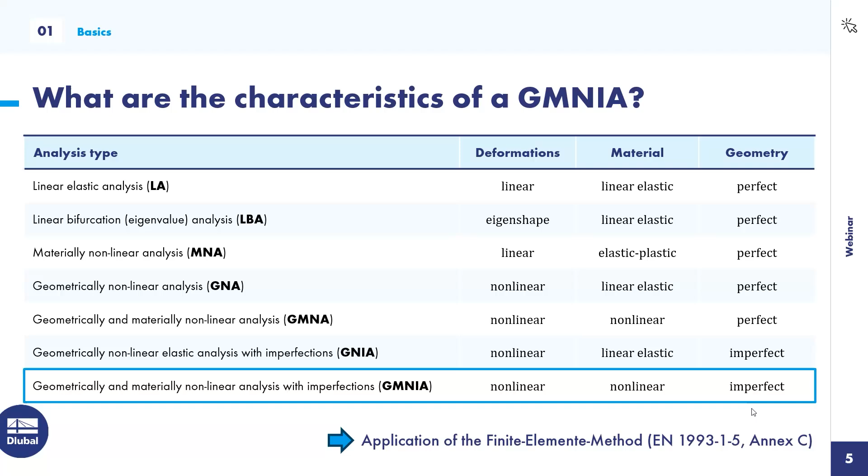Some rules for the application of a finite element method in this context are given in Eurocode 3, part 1.5, Annex C. And this will shortly be replaced by a dedicated Eurocode dealing with finite element methods and their application for steel structures, which will be bundled in Eurocode 3.1.14 in the second generation of the Eurocode. And I will refer to this new code as well during this presentation.

You can think of the GMNIA as a virtual capacity test, which means that the design load is increased by a load factor until a clear state of failure is reached. Two limit states are defined in Eurocode 3 Part 1-5 for the definition of failure and the determination of the critical load factor, which is the minimum of the following.

The load factor when the maximum of the load-deformation curve is reached, as shown here on the left side of the slide, and the load factor when a maximum value of the principal plastic membrane strain is reached. This is usually given by the annex or the base code as 5%, which is tolerable, but there might be some additional requirements in the national annexes.

The critical load factor is then the minimum of those two alpha U values, and this is then checked against the product of two safety factors on the resistance side, namely alpha 1, which describes the uncertainty of the numerical model, and alpha 2, which describes the uncertainty of the load and resistance model. Here it is recommended to stick to gamma M1 if the observed failure mode corresponds to stability, or gamma M2 if we see that the maximum plastic membrane strain is reached.

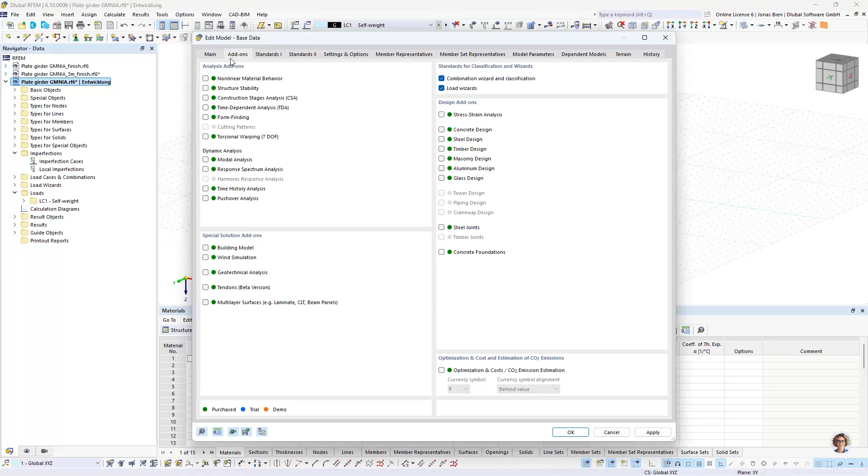All right, after we clarified this, let's go into the program and start modeling this. So I have already prepared a fresh file where we can now introduce the plate girder. As you can see, I have no objects here whatsoever, and also if we look into the base data of this file, there are no specific options activated. It's all a standard type of model, 3D and so on.

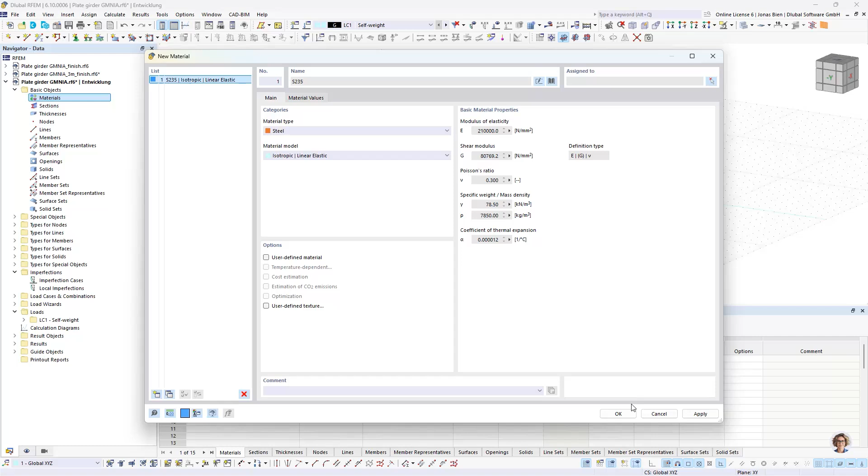Okay. So first of all, let's start with the material. We said we want to use an S235. So let's choose one. I always like to choose one that is related to Eurocode 3, but another one would also work. Then let's move on with the modeling of the member itself. We could either directly go with the surface definition and try to place the flanges and the web plates in the correct locations, and also then we have to assign the correct thicknesses and so on. But we can also use another way.

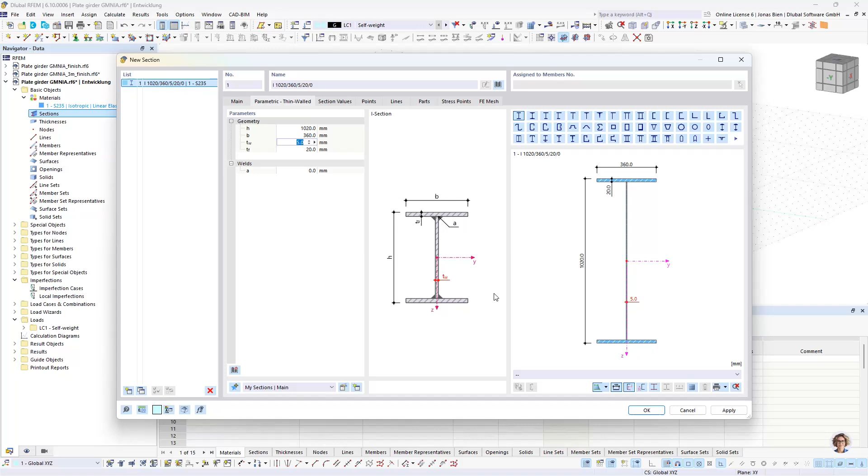We can first start with a member that has the correct cross-section, and then we transfer this member into a surface model. So I start with defining a parametric welded double symmetric I-section in my section dialog with the respective dimensions that I want to have. So height is 1020 millimeters, width 360, thickness of the web would be 5 millimeters, and the flanges 20. So now it more or less looks like the picture that I have shown on my slides.

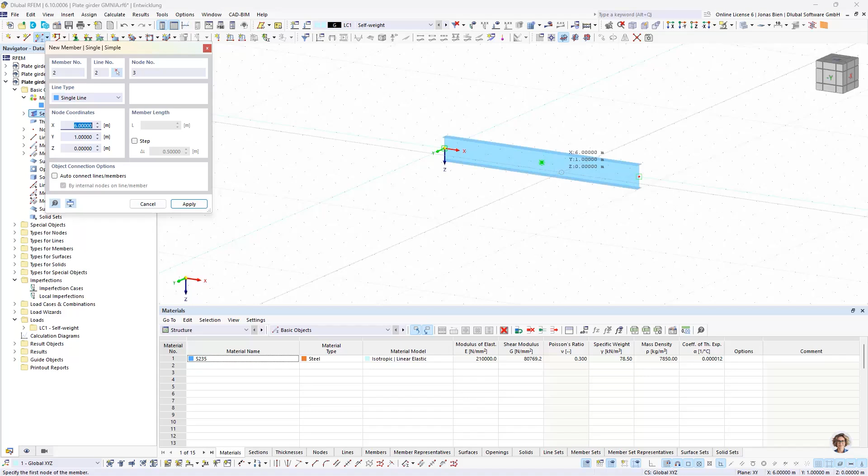I accept via OK, and then I just place one half of my plate girder in the model. So one span was 4.5 meters, so I want to take in the initial model 2 panels, and then we can later mirror it. So before I generate surfaces from this member, I also divide it, because I want to have a stiffener and some load introduction lines at the central position here. So I first divide this member with one intermediate node, and then I move on and generate surfaces.

And what this does, it already automatically generates these thicknesses that I need to represent this section in a surface model. It creates the nodes, the lines, and finally the surfaces that are necessary for this model. So this is a good starting point, I think. Next, we want to create the stiffeners to finish the surface modeling part. Therefore, I need an additional thickness of 12 millimeters that I wanted to use for the stiffeners. I can also write a reminder for myself that this is for the stiffener, this is the web plate, and this thickness is defined for the flange plates.

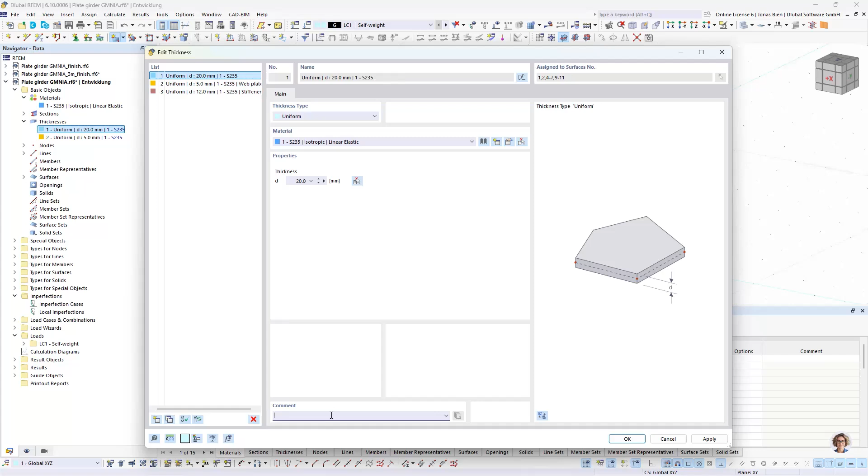Okay, I accept. And then I just place some rectangular surfaces in those positions where I later want to apply the loads. And then if we think about this as being the left half of our plate girder, we also said we want rigid end posts. So I would generate this by adding some outstanding cantilever part here with an additional stiffener to really have a very compact section at the end that can serve as a rigid end post.

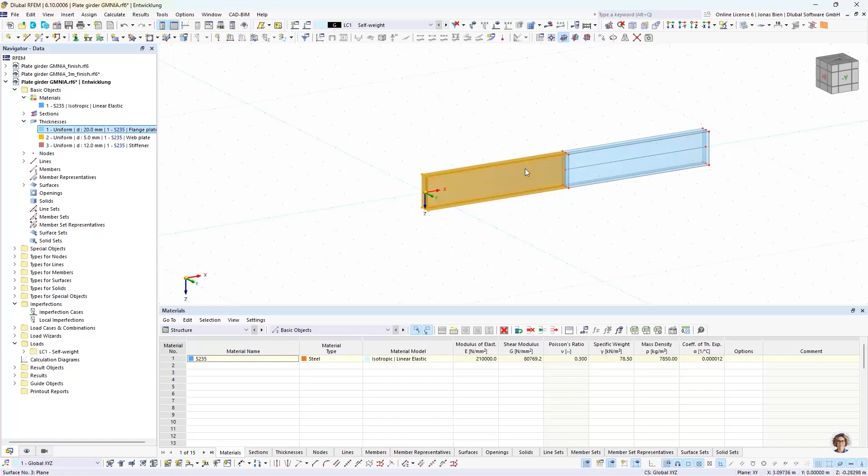And I can come to this modeling variant by just copying, for example, this panel here to the end. And then we know that the length of this is also 4.5 meter, and I want to have a very short and compact cell here at the end. So I just move the end section back towards the initial position of this stiffener by, let's say, 4.2 meter. And then I have a nice rigid end post here without needing to define additional surfaces by hand.

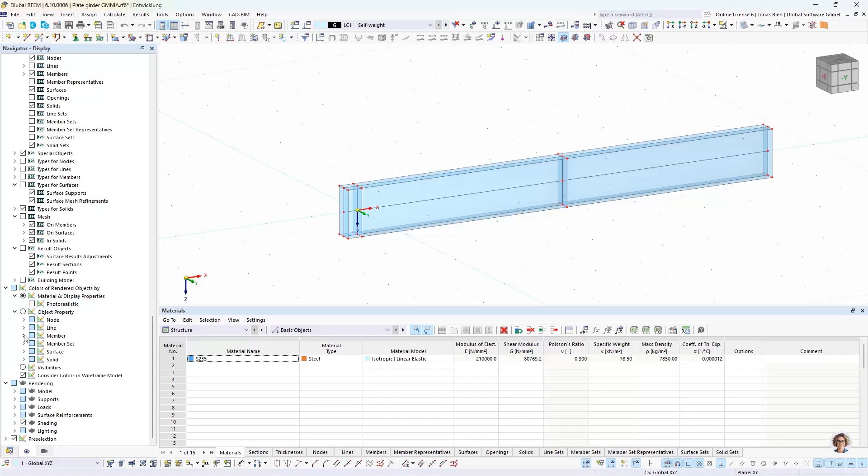Okay, so, oops, didn't mean to do that. All right, so then we can check maybe if we assigned the correct thicknesses. I always like to check the rendering based on the thickness. So we get a nice overview of what thicknesses are represented in the model and where they are. So this seems all fine to me. So we can continue with assigning the supports.

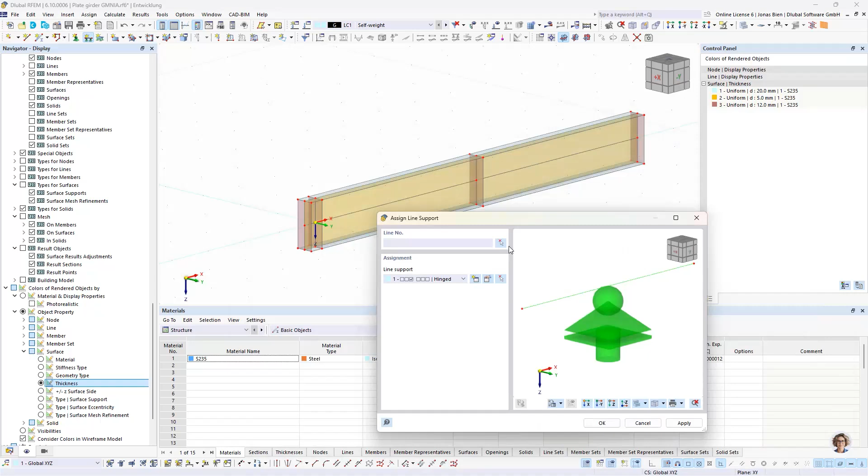And I want to avoid singularities at the vertical supports. So I try to use line supports at this second line of the stiffener here. And I just want to support this line in Z direction. I don't want to restrain any deformation along the line or in transverse direction. So I only support, I already see another problem because we defined those rectangular stiffeners here over the existing surfaces. We have some double lines here, and we can quickly merge them by just cutting and merging them via this tool. And now we have single lines here in these locations. So that's a quick fix. And now I move on and assign the vertical supports here at these two lines.

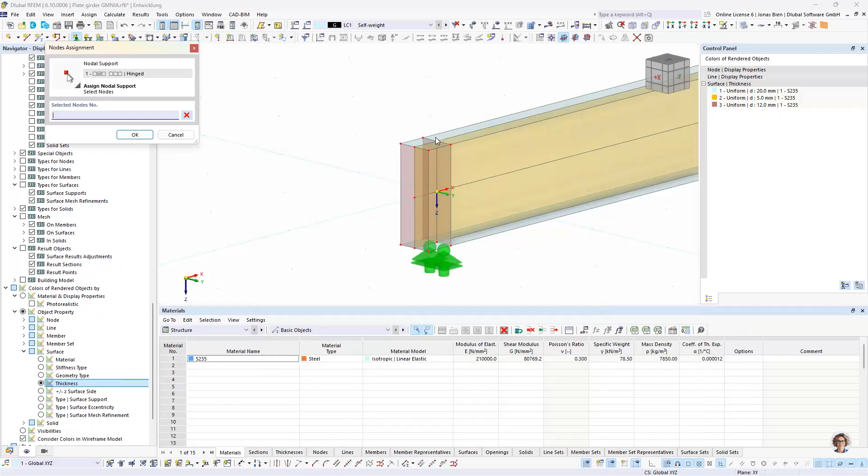Then I need to take care of the lateral supports. These I assign as nodal supports in some points that are very stiff. So first of all, I have my lateral supports that I wanted to assign at the ends and also in these quarter points. So I choose as a point of reference the crossing between flange and web plates and the stiffeners. And then I also need to make sure to also couple this point here in Y direction so it does not tilt. And also I need to somehow support my model in X direction. And that's why I also want to define one support in global X and Y direction at the lower flange here, like here. All right. So that would also be the respective support conditions that I want for my half model.

I can later just also mirror them when I want to create the full model. But before we do so, it would be wise to also define the loads, because there we can also leverage on the mirror operation. So we go ahead and define our loads. Maybe one look back to the task description. Yeah, here we can already see that we have concentrated loads, 3 different loads here above the endpoints and the quarter points. The first one represents dead weight. The second one comes from snow, and the third one comes from wind pressure. So these I want to define separately for those 3 load cases.

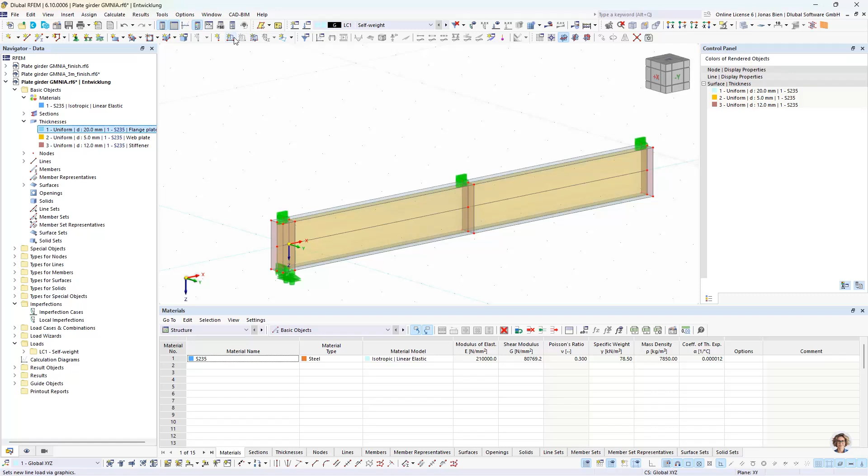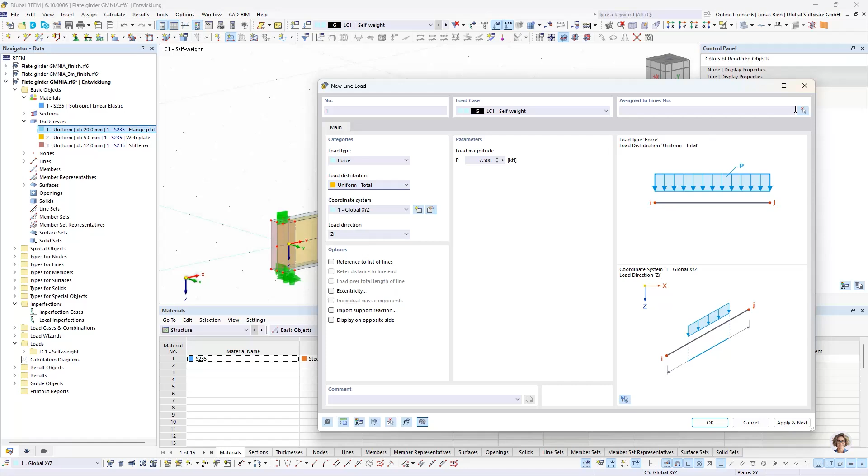So let's start, or maybe we start with the definition of the dead load here in the first case. So let's do that. I want to apply those loads as line loads, also again to avoid singularities when using nodal loads. And I could now go along and start with calculating my equivalent line load for a concentrated load of, for example, 15 kilonewtons by hand. But I could also use load distribution type uniform total, where the program does this job for me. And I just have to enter the total load that I want to apply over the length of one line. And since I have 2 lines here, I need to divide my 15 kilonewtons by 2 to get the total load for one line. I want to apply this in Z direction,

and now I just need to select those 2, assign this, and Rfem already calculated the correct kilonewton per meter value for us. If we multiply this value by 0.36 for the width of this flange, then we get 15 kilonewtons in total as we wanted.

Okay, we can then just copy this definition to the internal lines or purlins where the load is transferred to our plate girder. Here we had a slightly higher load of, I think it was in total 25. So each line gets 12.5 kilonewton. And this definition we can also copy to the central lines here.

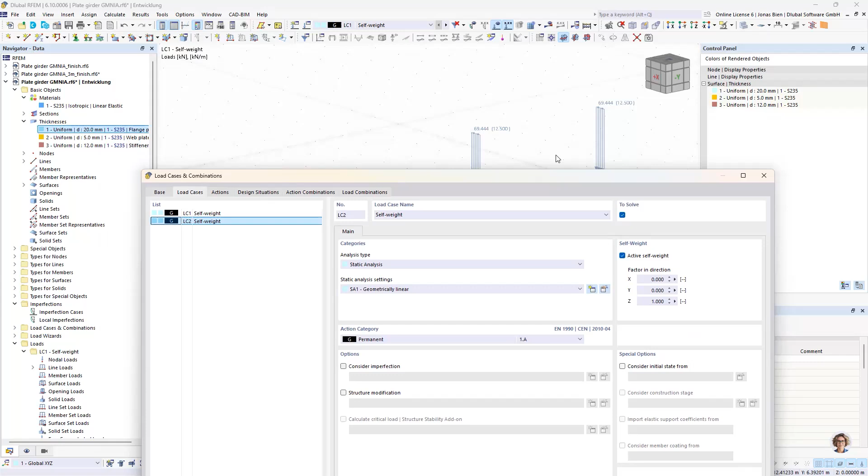And now we make a smart move and generate our second and third load case from our first load case. And we do this by copying our first load case. This means that also all loads that we defined in this load case are copied. So we just have to change the action category. Now in the first place, I want to define the snow loads, and we have to take care to deactivate the self-weight if we copy from the self-weight load case. Otherwise, that would be considered twice.

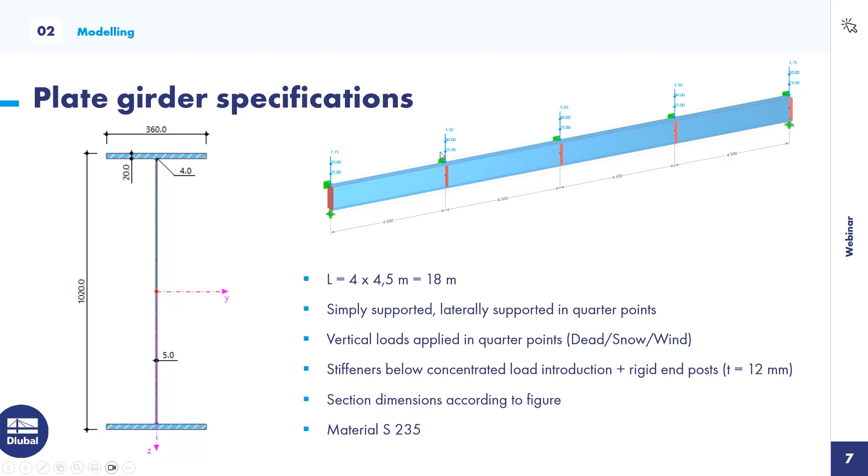And we do the same for wind, choose the appropriate action category, and click OK. And now we can go to the table. This is the easiest way I find to manipulate those load values, because we just want to change values. As you could see here in the slide, we have the same load type for all load cases, just different amplitudes. So for snow, we would have 20 kilonewtons and 40 in the internal positions, and for wind it would be 2.75 and 5.5 in the internal positions. So we just need to change the values basically. So let's do this via table.

For the snow load, we had 20 kilonewtons divided by 2 and 40 kilonewtons divided by 2 in the internal positions. And then for wind, it was 2.75 divided by 2 and 5.5 divided by 2. This gives us the respective concentrated load distributed to those lines. All right, and I think then we can already mirror the whole thing. Maybe I don't want to mirror this load here because we have already defined this for the central position. I don't want to do that again.

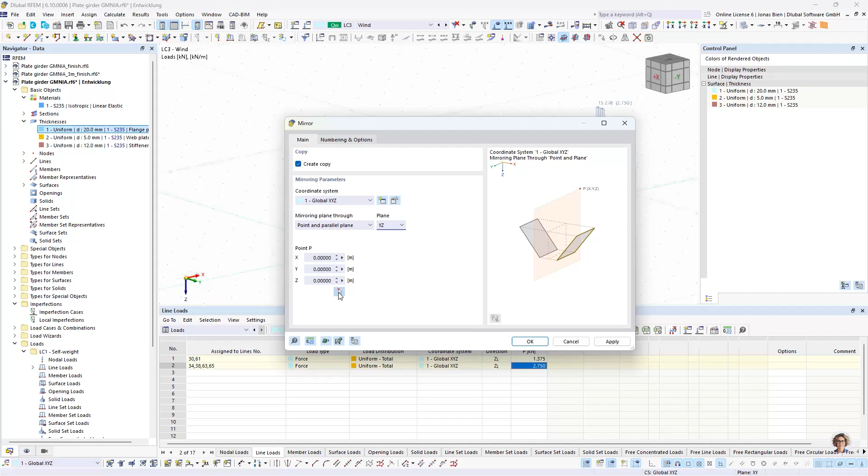And now I mirror all the selected objects about the YZ plane, and the plane should go through this point here. I make sure to copy the included loading and click OK. And now I think by doing so, a copy included loading, it also recognized all the loading on these lines and copied it, although I did not manually select it. So now, as you can see, we have a double load here, and we just quickly delete this.

Okay. Then I only need to do one additional modification of this mirrored part. I don't want to hold the plate girder in X direction on both sides. I don't want to activate any membrane forces here coming from large deformation in X direction. So instead of using support in X and Y direction here at the end node, I just copy the definition from above and just place a nodal support that supports in Y direction here instead. So it is free to move in X direction now.

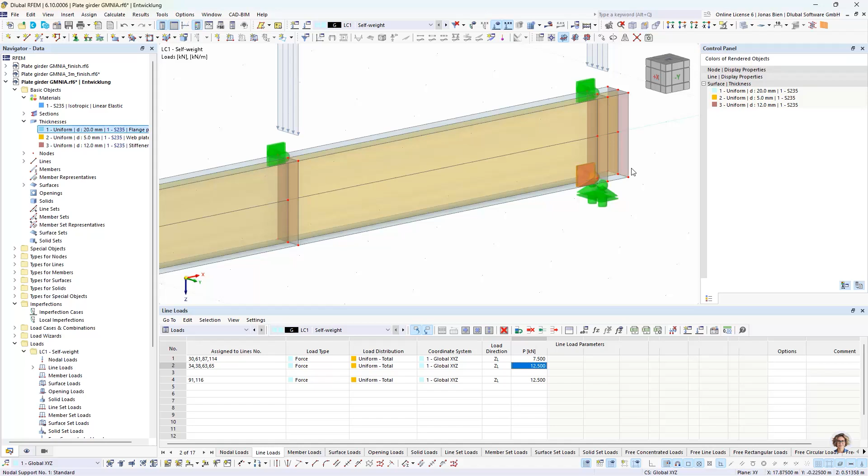Okay. Then one more important part when creating a surface model in the context of steel design. Usually our base settings for the mesh are not really suitable. This element length of 0.5 meter is more suitable for, I don't know, concrete slabs and foundations. So not for us. Otherwise, we would only have 1 or 2 elements over the height of our plate girder, and that wouldn't be sufficient to get a good model here. So we just use 5 centimeter in the first step and check the mesh visually to check if it is reasonable. And I think in the first step, this is all fine.

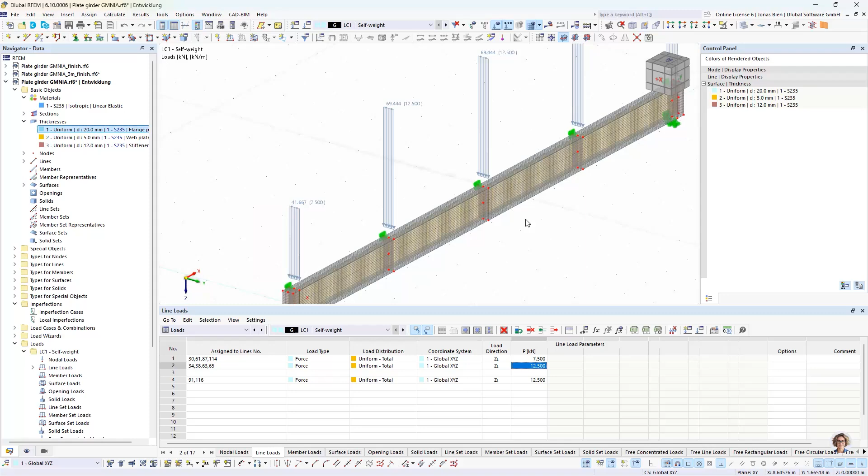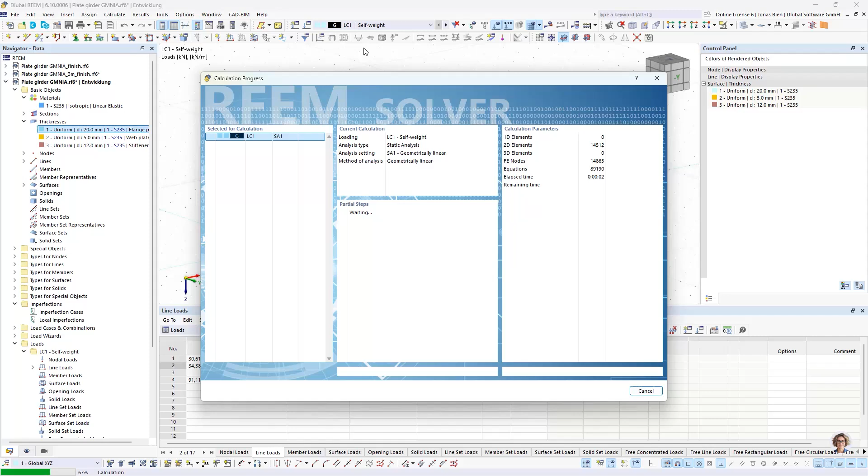It is always advisable anyway, in the context of a GMNIA, to make some sensitivity study of the mesh refinement at some point. But I think this is a good starting point here, this level of refinement. We can also check if we defined the model properly by just running one test load case, for example, load case 1, and see if everything is connected properly, if we have supported the model sufficiently. And it looks quite okay to me. The deformation shape looks as expected. As I said, it can deform in X direction here at the end, so no restraining forces in axial direction. We can also check the stresses in X direction. We have only bending here, so everything as it should be, and this is fine.

Then maybe we need to think of a combination of our load cases. So let's go there as well.

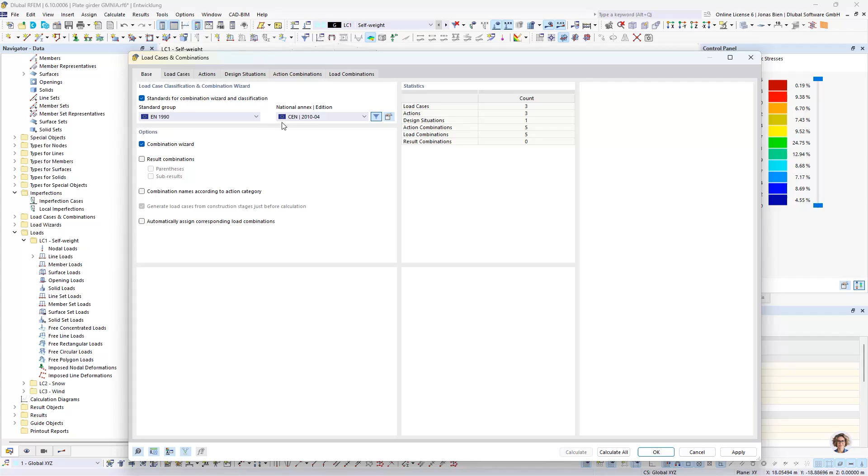By default, we have 4 different design situations that RFEM generates for us in a new model. We only want to do checks in the ULS combination, only for strength. So we leave that in, and that gives us, with the combination wizard activated by default, 5 different load combinations. But for us here, it is very easy to see that load case or load combination number 3 results in the largest loading, or is the most critical combination for our case.

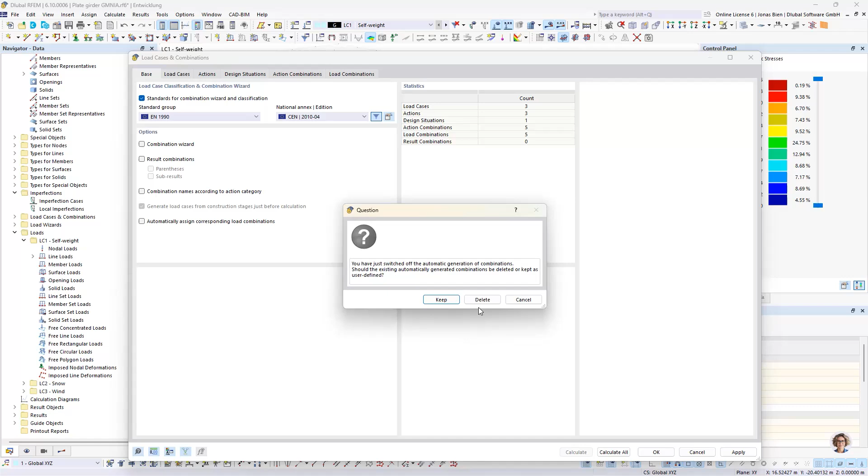Because I know that GMNIAs are quite heavy on computational time, I want to reduce the load combinations I need to take into account to a minimum. So I deactivate the combination wizard, say I want to keep all the load cases and combinations, and then I manually delete all other load combinations and only leave CO3 for later analysis. And then in the first place, I use first order theory for analysis.

Okay, I think that's it for the definition of our base model, and we can now tackle the special ingredients of the GMNIA. So let's start with the imperfections.

According to Eurocode, residual stresses resulting from the manufacturing process of steel girders need to be taken into account. These residual stresses originate from uneven heating and cooling of the material during manufacturing. In a plate girder, very high local temperatures and corresponding material expansion occur when the web and flange plates are joined by welding. The individual cross-section parts are joined in this heated state, and if the component then cools down again, constraint-free contraction of the material is no longer possible, and residual stresses remain in the cross-section. Those stresses are in sum in equilibrium with each other across the cross-section.

The stresses shown here on the lower right side are specified in the draft version of Eurocode 3, part 1-14, for welded double symmetrical I-sections. In principle, it is possible to consider such residual stresses in RFEM, although a bit cumbersome. But since we occasionally receive customer requests about this, I would like to show you in a short excursus how to approach this problem.

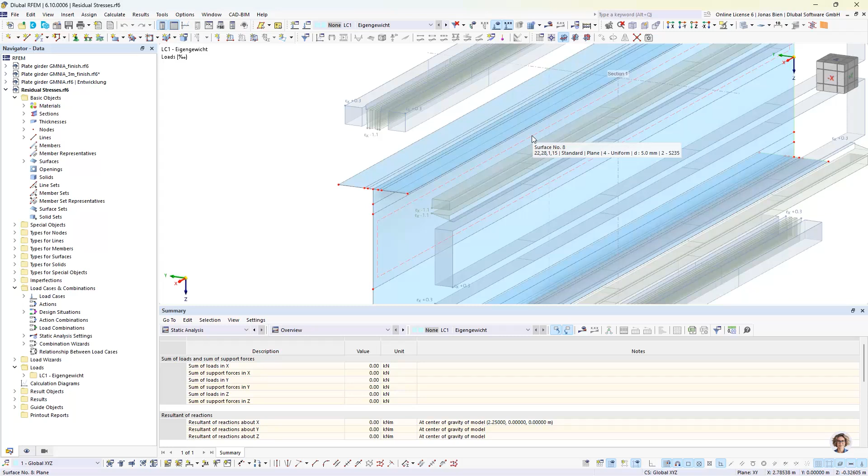But I want to explain the most important steps here. I have divided my model basically, and then I applied an actual strain state. You can find those under surface loads, load type actual strain, where you can choose between a uniform and a linear load distribution. In this case, for this constant strain or stress block, I defined only a uniform distribution with a magnitude of 0.3. If we check, I've entered this via formula—I just divided my yield strength by the Young's modulus and divided it by 4. This leaves us with a positive strain, and the positive initial strain leads to later compressive residual stresses. We will see that when we run the simulation.

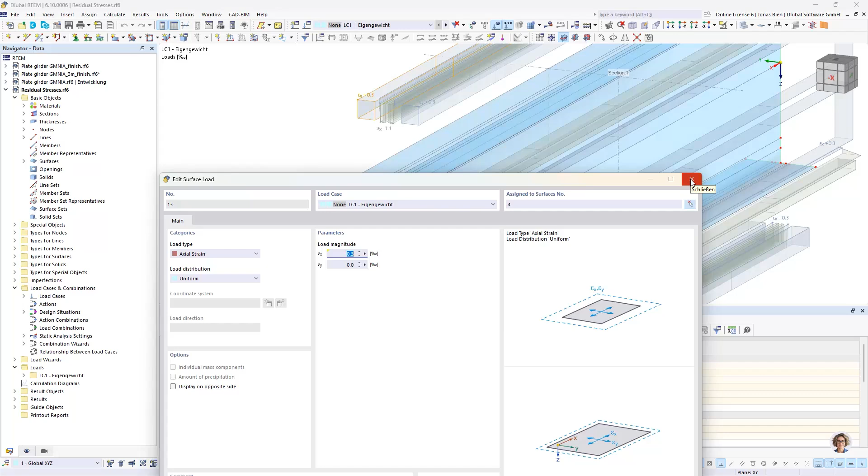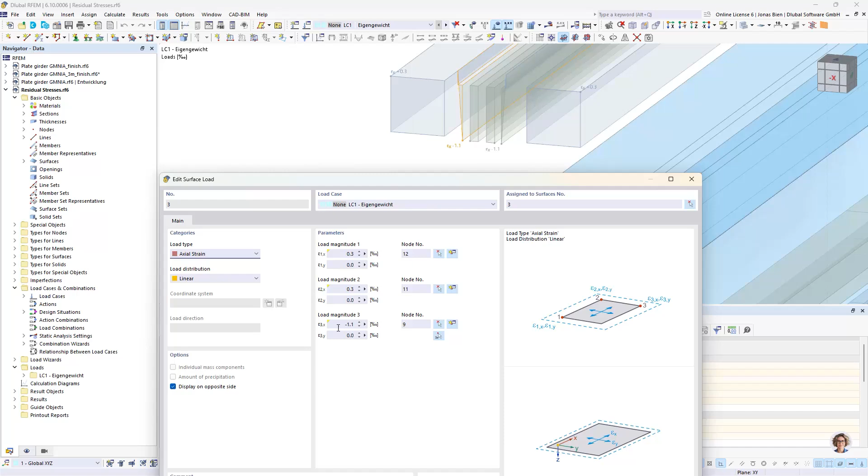Similarly, I did the same in the middle of the flange plate, where I just defined a block of axial strains with a negative sign now, and this is just described by yield strength divided by Young's modulus. And then in between, I applied this linear load distribution. I used 3 corner nodes to describe the distribution of my loads. You can check this out in the German webinar if you're interested, but it's pretty straightforward. Here I just defined 2 nodes with a tensile strain and 1 with the compressive strain to get this distribution over the flange plate.

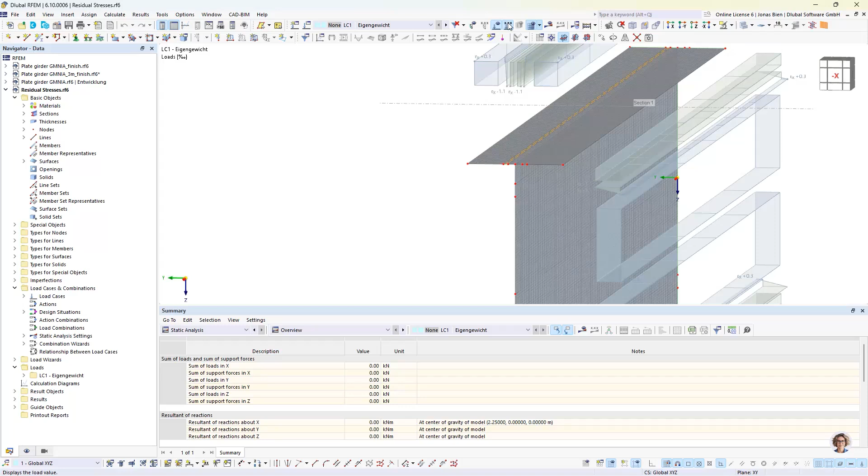And I did the same basically for the web plate as well. So what I've done also was I changed the mesh size a bit. I chose very small element edge sizes, so I have at least 2 elements over each surface. So we can also see this linear gradient in the stress distribution here. We can actually represent this with the mesh size. Yeah, and that's basically it. So let's check the results.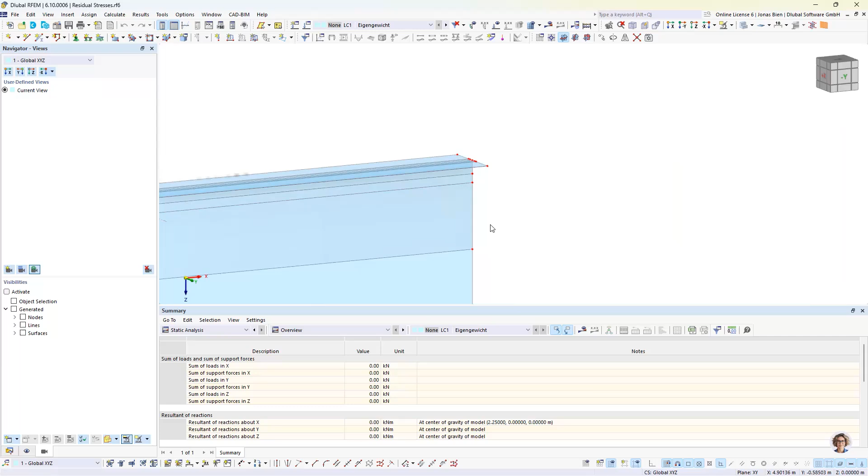I've already computed it. Maybe one last note. On this end of the girder, I have applied some line support, where I just held basically every node in place, also in X direction. This is very important because by doing so on this end of the girder, I restrained every warping of the section and every deformation in X direction, in longitudinal direction. On the other end, I didn't do that. So here all my filaments or fibers of the section are free to move in X direction.

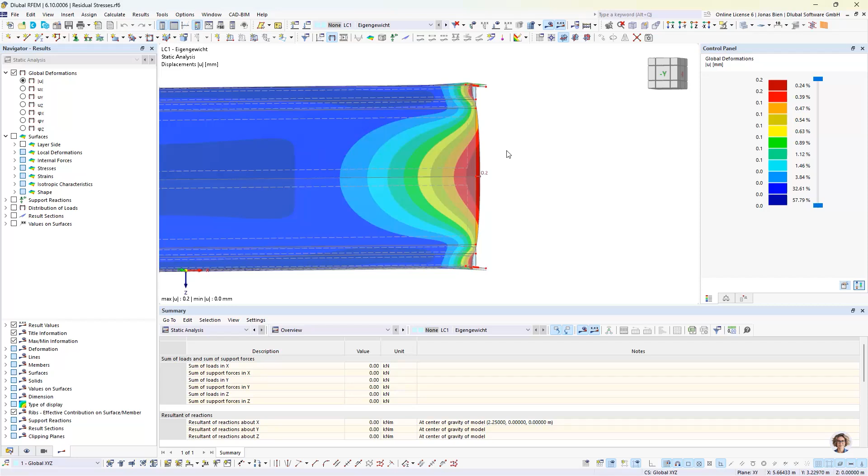And we can see that this has a great influence on the resulting stress state. Here, where we have more or less a disturbed state, where movement is free in X direction, you can see that those residual stresses actually vanish, and they diminish here at this free edge. But basically, this is what happens in reality as well. If you have such a girder and you would cut it in some plane, then these residual stresses would be freed, and you actually see that in the deformation shape. So the section would go into the shape it wants to go after with the residual stress state, and that would be the way it would look at this free edge. Of course, this is exaggerated here, so the resulting deformations would be very small, but that would basically happen in reality as well. On the other edge, I held every node in place, so it cannot happen there, just to show you the difference and the behavior that we get by simulating this effect.

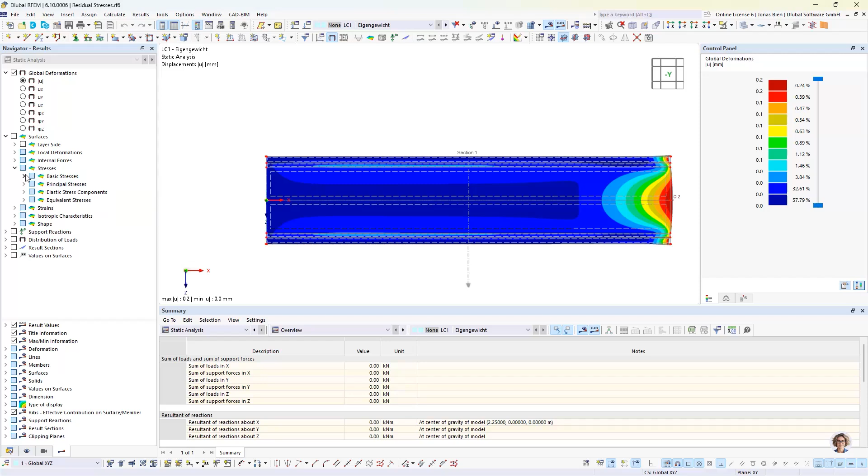Let's check the stresses again. I've now shown the stresses in X direction, and we can already see that we have compressive stresses in these blue areas, and in the red areas we have some tensile stresses. It's not very good to see the actual numbers. That's why I also inserted a section here in the middle, with a certain distance to the member ends to have an undisturbed region. And maybe we can also check the stress state in this section. Here we actually see that in these tensile zones between flange and web plates, we have almost exactly the yield stress as a residual stress, and in these compressive parts we have Fy divided by 4. So this is exactly what we wanted to simulate when we look back into our PowerPoint slide. So this is one method to apply such residual stresses in a surface model of such kind.

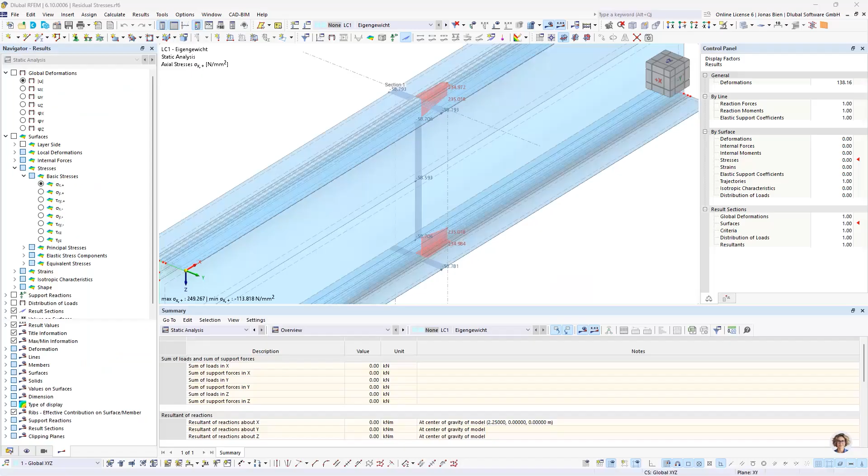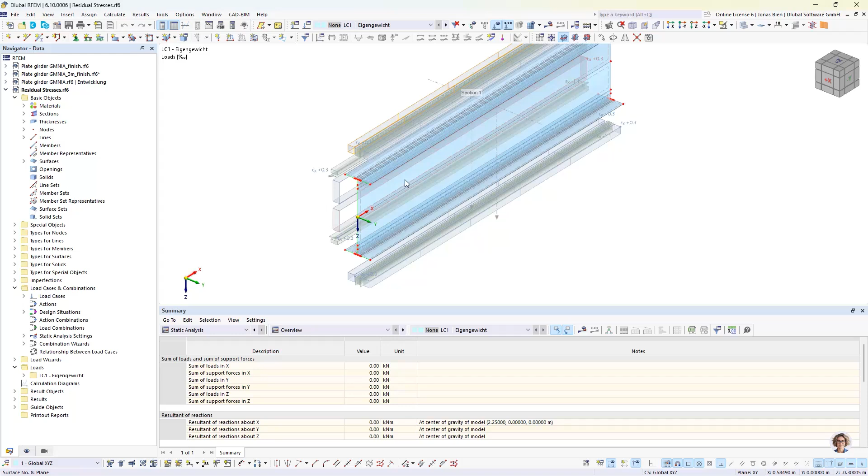Another way would be to not use this load type axial strain, but to define a similar thing via temperature increase. We could apply some temperature, and then with the material properties, we could simulate a similar elongation that the steel would like to make, and since it is restrained over the cross section, we would get a similar residual stress, just that we would need to add an additional step and take into account this alpha elongation factor or expansion factor of the steel, which makes it a bit more complicated. So this is the easy way to do it. All right, but this was just a small excursus. Let's get back to our actual model. Of course, I will also upload this smaller residual stress model with the slides, so you can study this for yourself.

Okay, back to the presentation.

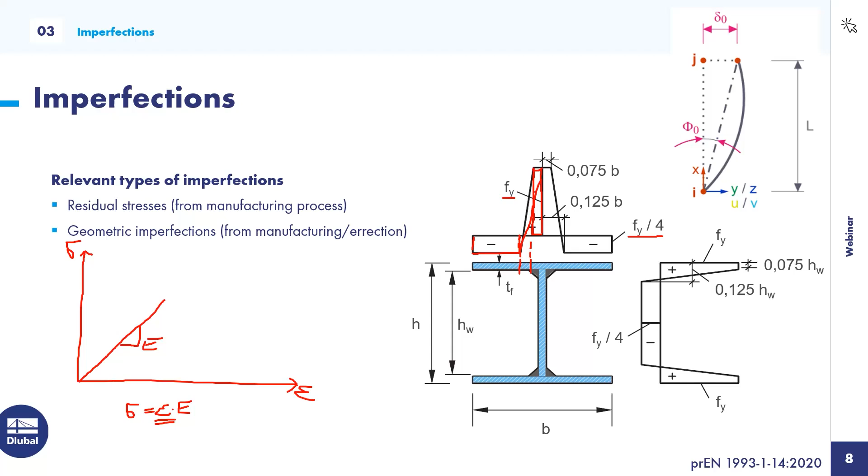We have now talked about one relevant type of imperfections, which is the residual stress, which comes from the manufacturing process. In addition to residual stresses, we also have to take into consideration geometric imperfections. These simulate deviations from standard dimensions or misalignments of elements during erection on the construction site. We know such geometric imperfections from Eurocode 3 1.1, for example, and this is exactly what is meant with this type of geometric imperfections.

So we could either specify residual stresses and geometric imperfections separately, but we have seen how cumbersome the definition of residual stresses can be. And for some sections, we might not even have a clear statement for how to approach this residual stress problem. For a double symmetric welded I-section, we have the definition given in Eurocode 3 part 1.14, but there may be cases where this is not applicable.

Luckily we have an alternative: Eurocode 3 part 1.5 also allows us to take into account the residual stresses not explicitly, as we just did in this small model, but by increasing the base geometric imperfections. So just apply geometric imperfections and increase them by some factor. Both types of imperfections are then summarized as equivalent geometric imperfections.

This is the approach we want to take for our plate girder. Let's look into those equivalent geometric imperfections in more detail. The good thing is that we don't need to increase the geometric imperfections ourselves, but the magnitude for those imperfections is actually given in Eurocode 3 part 1.5, and these already contain the residual stresses.

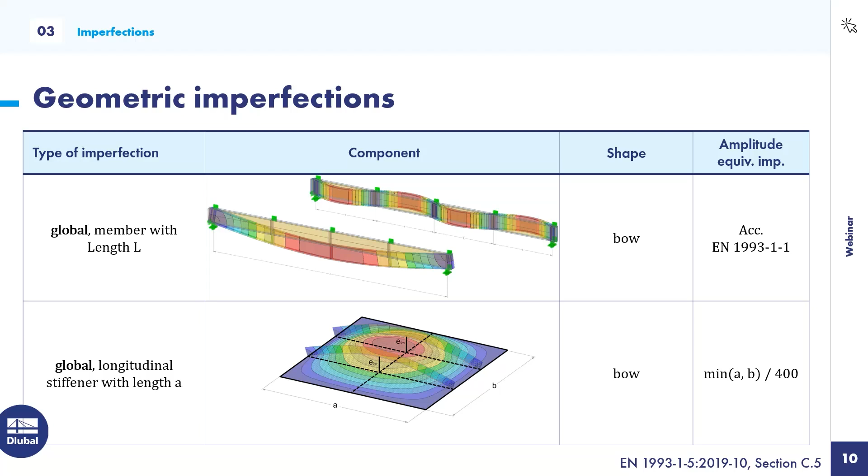According to Eurocode 3 part 1.1, such imperfection should be defined affine to the imperfection for flexural buckling about the weak axis, but with half the amplitude. So to find the specific amplitude, we go to Eurocode 3 part 1.1, check table 6.2 to see what buckling curve we have for buckling about the weak axis. In our case, we have a welded I-section with flange thickness less than 40 millimeters, so we would choose buckling curve C.

Next, we check table 5.1 of Eurocode 3 part 1.1, and we choose the imperfection value for a plastic section check. In the end, we are doing a nonlinear analysis with nonlinear material, so we are also accounting for redistribution in the cross-section, which means we basically want a plastic section check. With this information and the buckling curve, we can then read the imperfection amplitude for our equivalent imperfection as 1 divided by 150 for buckling about the weak axis.

We would then need to take half of this for our lateral torsional buckling imperfection. The last question is then to which length this value refers. Our flange is under compression and held at the quarter points, so we apply the imperfection alternating between those intermediate supports, as also shown above in the figure on the slide.

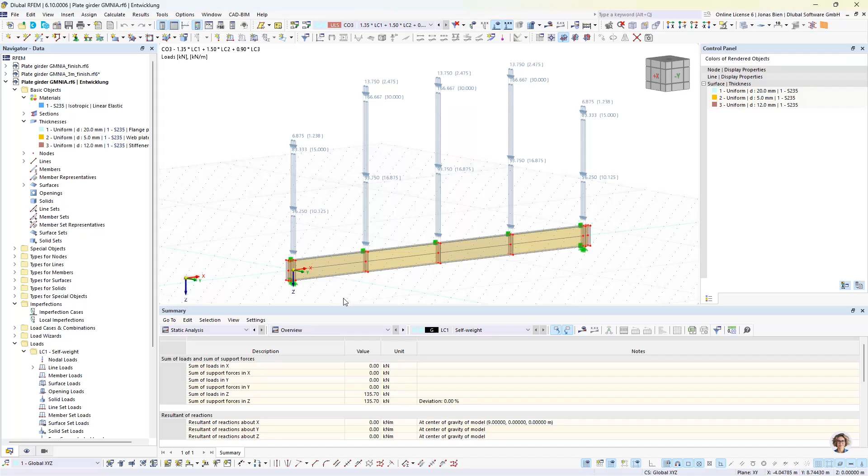So first of all, we define an additional load case where we apply a load that gives us a deformation shape of the structure, which is more or less equivalent to the imperfection shape that we want to apply. So first I start with defining a new load case. I name it bow imperfection, static, maybe to remind myself. Action category for such kind of load cases I set to none, because that way I avoid that it accidentally gets combined with other things if I have a load combination assistant activated. And now in this load case, I define some loads that give me the deformation shape that I want to take as an imperfection shape.

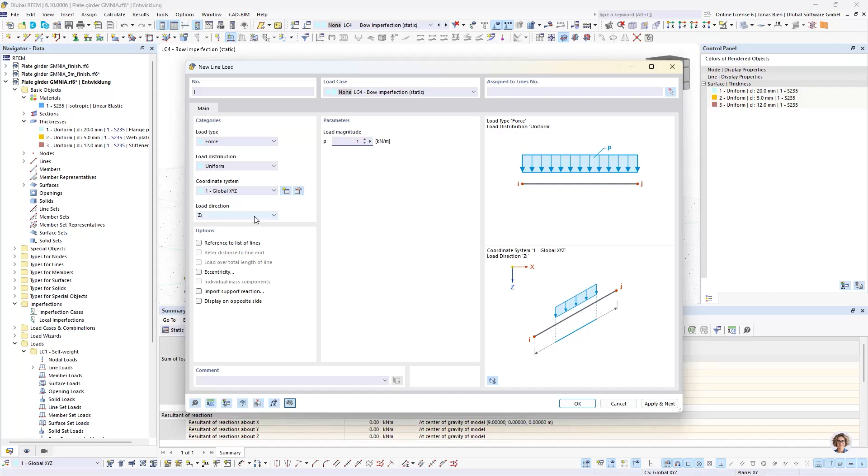So I would just scale this to a default value. It doesn't matter in the first step how large this deformation appears in the static analysis step. We can scale it later in the imperfection when we apply the imperfection case. So first of all, I want to deform my girder in y direction by defining loads on those lines between web and flange plates. So I avoid that my section itself deforms. I want more or less a member deformation without distortion of the cross section. So I just apply this, let's say, dummy load in one direction, and then I alternate the direction of the deformation.

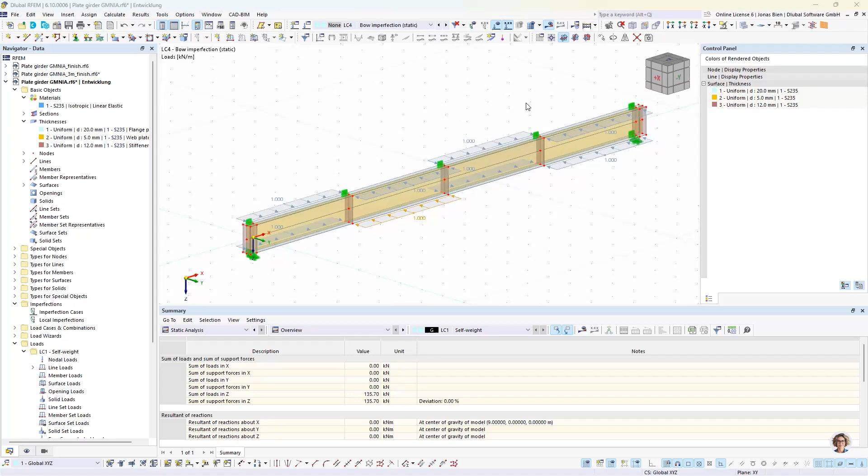And now if I run this analysis for load case 4 that I have just defined, we hopefully see some kind of bow-shaped deformation here. Let's actually check the global deformation, and yes, this looks exactly as expected. I get a bow-shaped deformation shape with zero points in the inflection points and the quarter points where I wanted to have them. So this is a good basis for my imperfection shape. You can also see that the maximum deformation here is 0.3 millimeter. This is of course a bit too small for the imperfection that I need. We said we want to define the length between these inflection points divided by 300, and that would be 4.5 meters divided by 300, so 15 millimeters. But that can actually be set then in the second step, where we define the imperfection itself.

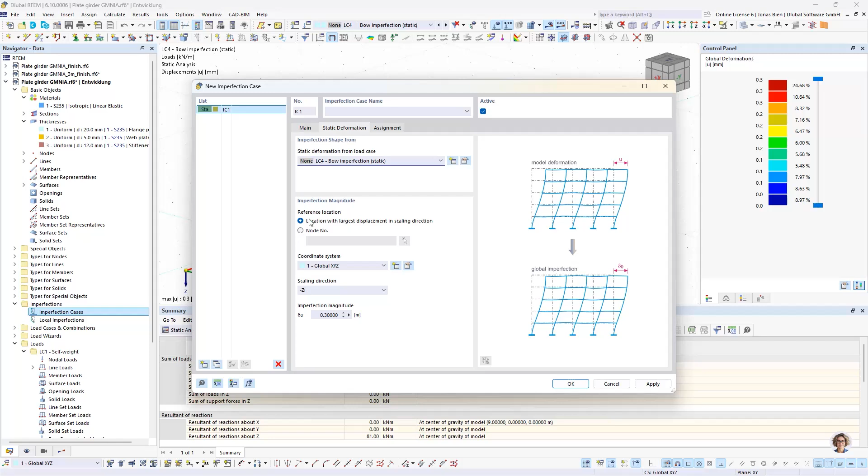In this case, we want to use an imperfection type static deformation. There we have to reference a load case or a load combination where we want to adopt the static deformation from, and then we need to scale it somehow. So in this case, I want to source my deformation from load case 4, and I want to scale it spatially, so just as it appears here when I check the total deformation plot. And I want to set the magnitude, I can just handle it via formula, to 4.5 divided by 300, which gives me 15 millimeters. And now I have this imperfection case 1 here, and this one I can also calculate or simulate, and it will now scale the deformation shape from load case 4 to the value that I want, to 15 millimeters, and that's exactly what we get here. It's nice to check this. And then we can apply this imperfection as we usually do, here, for example, to load cases or to load combinations with this option.

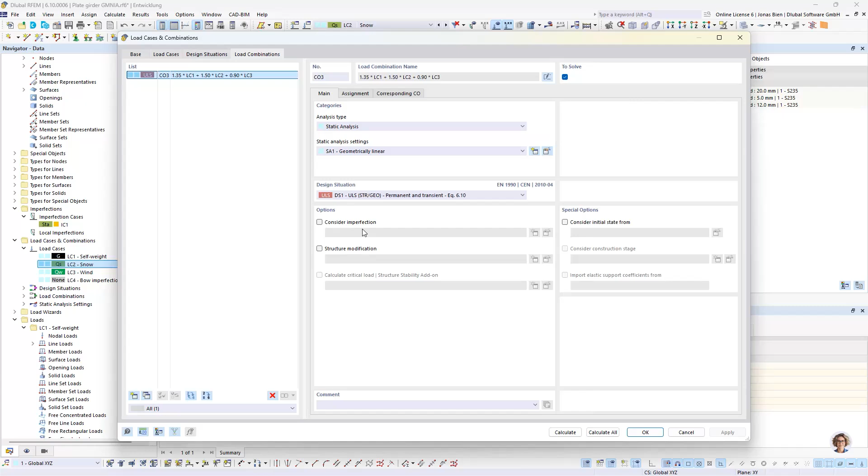But we are not finished yet. We need some other imperfections that we need to apply to our structure. So let's go back to our presentation. So first step is done. We have the global bow imperfection considered, but there are 2 more geometric imperfections in Eurocode 3 part 1.5 that need to be taken into account if applicable to the problem. And those are the local buckling shape deformations in the buckling panels or in potential buckling panels. And if we use geometric equivalent imperfections, the amplitude of such imperfections should be the minimum dimension of the panel divided by 200.

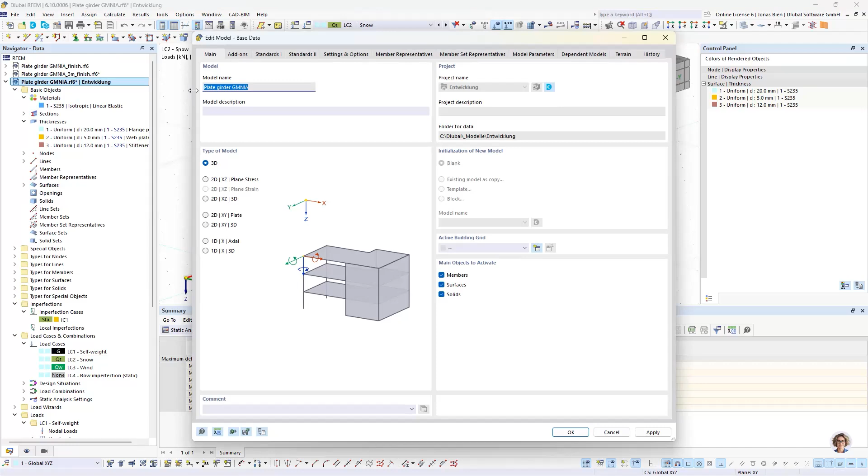So let's see how we can apply this buckling shape affine imperfection with this specific amplitude in RFEM again. So to get a buckling shape deformation, we of course first need to do a linear buckling analysis. For this, I need to activate my structure stability add-on, and then I get access to linear bifurcation analysis, and I want to set this one up for load combination 3, where my design loads are defined and combined. So for this load combination, I want to get some eigenshapes, and I want to choose the critical from that. So four eigenshapes are maybe a bit low number. I want to have some additional information, so I just set this value up to 20. So it will now, after defining the stress state in my structure, calculate the linear bifurcation factors, assuming everything is perfectly linear. So my whole problem is linear, and besides the linear bifurcation factors, I will also receive my respective mode shapes.

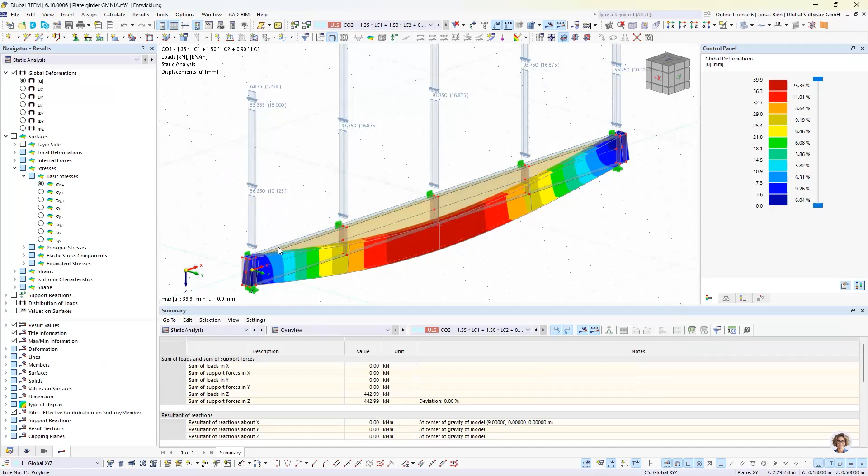So this takes a bit. I want 20 mode shapes, and these are quite a few elements, but it should finish very soon. So now, in addition to the static analysis results, I also get stability analysis results.

If you are interested more in this linear bifurcation analysis and what we can do with it, check out my last webinar on this topic. I think it was called something with linear bifurcation or buckling analysis in RFEM 6 and RSTAB 9. So there you can get a lot of background information and additional info.

So what we basically get now are 20 bifurcation factors with the respective mode shapes. And now the question is, of course, which mode shape do I need to take into consideration for my nonlinear analysis? And we can already see that the first 12 mode shapes only affect the external or the outer buckling panels here, while for the 13th we can see first modal deformation in the internal buckling panels.

And the Eurocode offers not really huge help here in this respect. It just says that the most critical imperfection needs to be taken into account. This is often not quite straightforward to get. So if we are in doubt, we would need to take into consideration different mode shapes and also maybe different imperfection directions. But for the start, it is always a good bet to just go with the first mode that actually has the lowest critical load factor in the structure. So we will now, for the first shot, so to say, go with this first imperfection here.

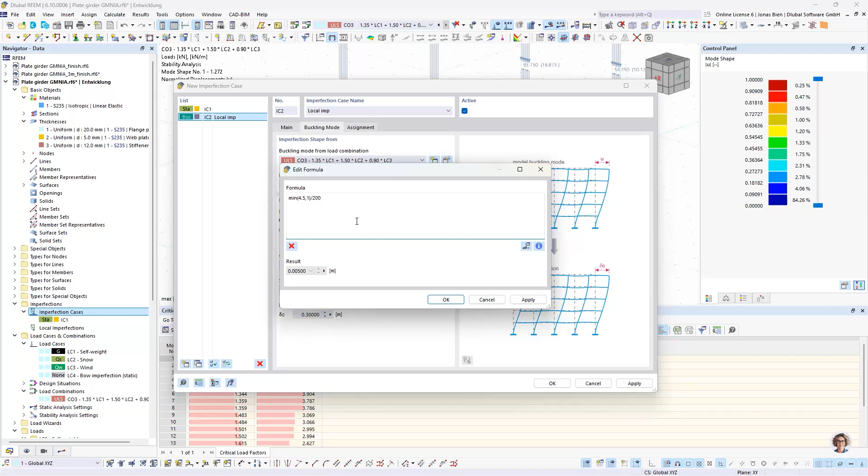And we also take an arbitrary deformation direction. We scale it spatially again, and as an imperfection magnitude, we set the minimum of the panel dimensions. So panel dimensions would be 4.5 by 1 meter divided by 200. It's always very convenient to just use the formulas to plug this in, and you don't need your calculator. You have a reminder if you are unsure, you can check the formula again and so on. So this is very handy. Okay, so that would be this definition.

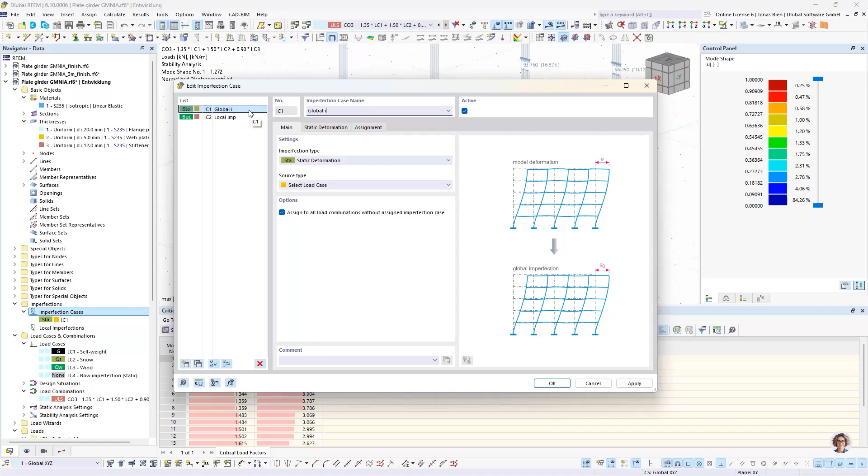Then let's also rename imperfection case 1 global imperfection, so we can have a quick distinction between those. And now if we also solve this second imperfection case, we should get the eigenshape that we just saw now, but now scaled to 5 millimeters maximum deformation. So that's perfect. All right, so 2 imperfections are now already defined.

Let's go back to the presentation, because there is a third and last type of imperfection that we must take into account, and this is flange twisting. And this flange twisting we need to consider between different sections. So in our case, we have some transverse stiffeners, and between those stiffeners we need to account for this bow twist, and the bow twist should have an amplitude of 1 divided by 50 times half the flange width.

And the question is again, how do we do this in our program? Because neither the static nor the buckling imperfection type are really helpful in this case. But what we can always do in this kind of analysis, we can always burn or engrave the imperfection into our basic geometry. And I want to show you this as a third option. So this means, of course, we need to redefine the model itself. But also in this case, or with the right strategy, that's also not a lot of additional work. In our case, we can just change the type of this line from polyline to arc.

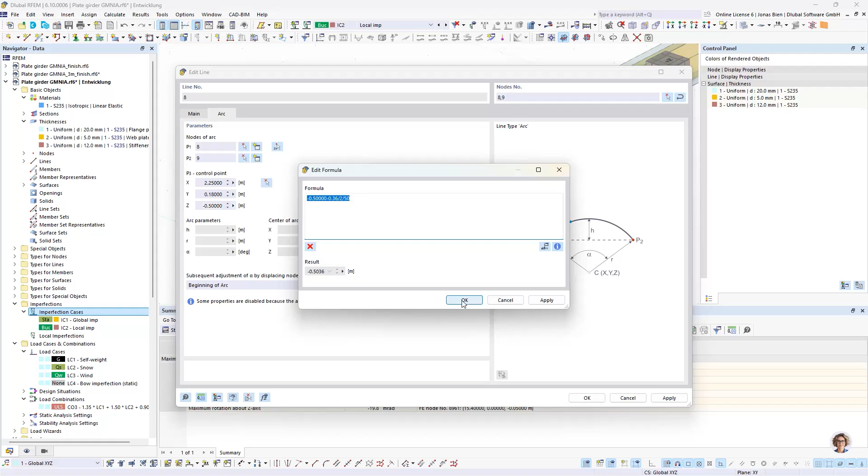Then we set a control point in the middle of the mid length of this arc, and then we set the arc segment height to the imperfection amplitude. So basically we need to change the Z coordinate of our control point. I again do this via formula, and I add to it the flange width divided by 2 divided by 50, and apply this change. And now we will see that when we look from the side, this is not a straight line anymore, but it's curved, and this will lead to a twisted flange in the end. So that's perfect for our imperfection.

But we also see that now we have some problem, because our surface here is gone, and this respective surface is now marked with the red color here. That is always bad, but it's a very easy fix in this case, because we defined initially this surface as a plane surface. This is no longer true, because one of the boundary lines is now an arc, and we can just fix it by changing the geometry type of the surface from plane to quadrangle, and this resolves the issue.

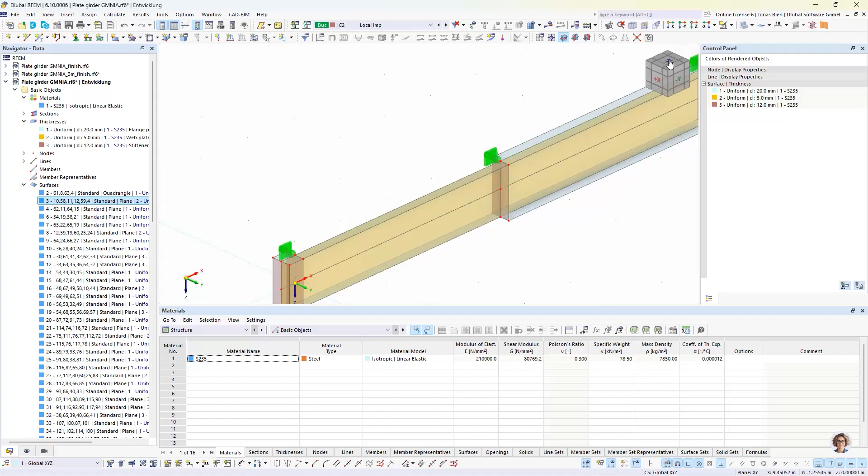And now the question is, how do we proceed from here, because there are many surfaces that we need to change. But instead of doing all of this manually, we can again be a bit more clever and use some modification functions to copy this imperfect geometry to the other locations along our member. So in the first step, we could mirror this surface, or rather rotate it over the x-axis. I think that would be the most appropriate approach, by 180 degrees. I create a copy. So this should be the axis of rotation, and the axis of rotation should go through this point.

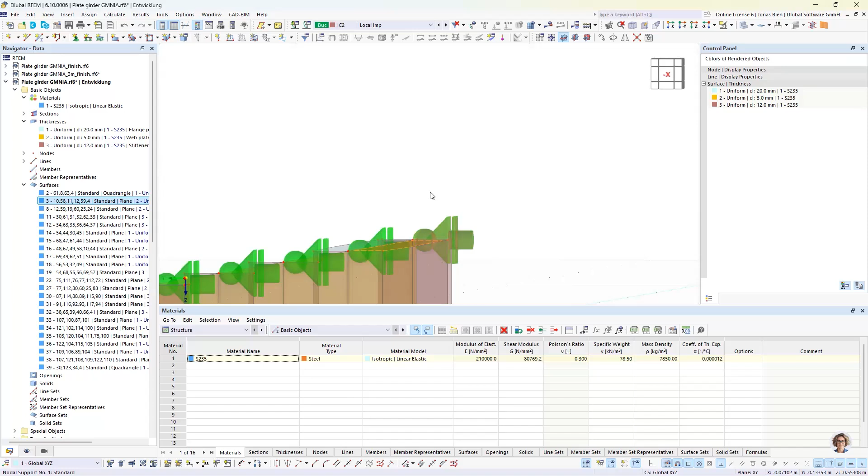So I click OK, and now I see that there's an imperfection on this side of the flange as well, but in the different direction. That's how I would assume this flange twisting would look like over the complete width. And now I can just copy those two surfaces from the upper flange to the lower flange. And in the last step, I take all those flange plates and rotate them again, but now over the z-axis, so the vertical axis, and I carefully choose my location of the rotation axis, like so.

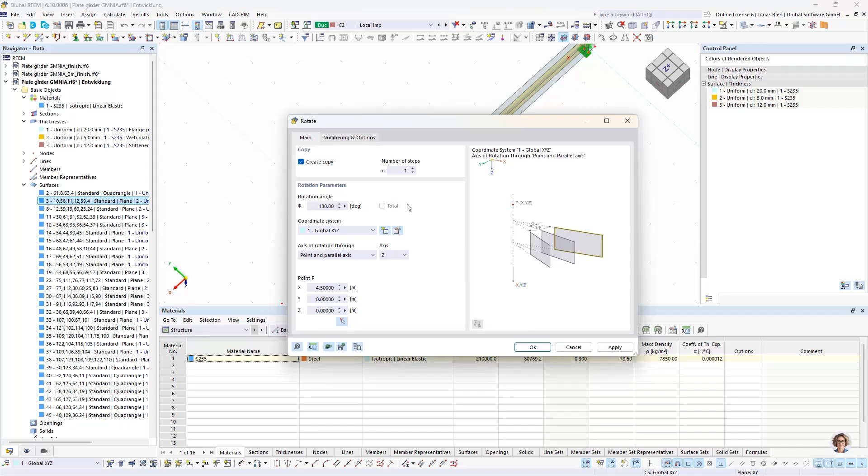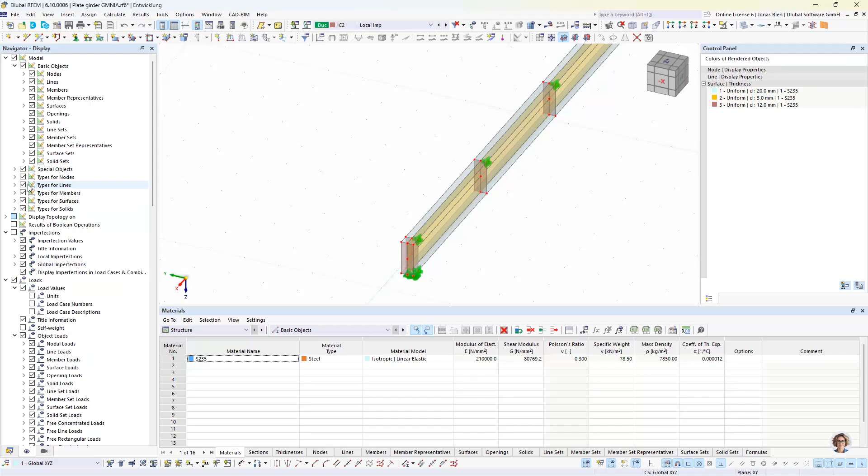And now I have to do this 2 times more to do this definition for the whole member length. And as you can see, by leveraging these tools in RFEM, it's quite easy and quick to create such imperfect geometries. So let's actually check how this looks now. We can clearly see that there is some flange twisting modeled here, exactly as we want. It alternates from one inflection point to the other one. So this should be the most critical case in this scenario, or the most reasonable assumption for such a flange twisting imperfection.

Okay, so now last question is, how do we combine all these imperfections together? In Eurocode 3 part 1-5, we have a combination rule for equivalent geometric imperfections. We have one primary imperfection that we assign with 100%, and the other ones we take with 70%. But just to make things a bit simpler here, I would just take them all with 100% amplitude, because in most of the cases, there are always 1 or 2 imperfections that are not really relevant or critical for the end result.

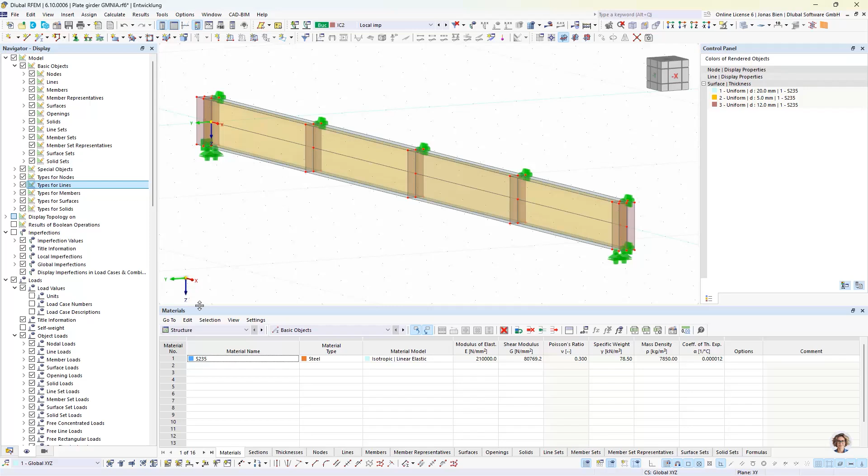So we could either put in a lot of effort to select the most critical one and apply 100% amplitude to this, or we can just, on the safe side, assume the full 100% for all imperfections, and the ones that do not really harm our simulation will just more or less do nothing. Of course, we could refine it later if we find that our solution is not economic, but due to time limitations, I don't want to do that here.

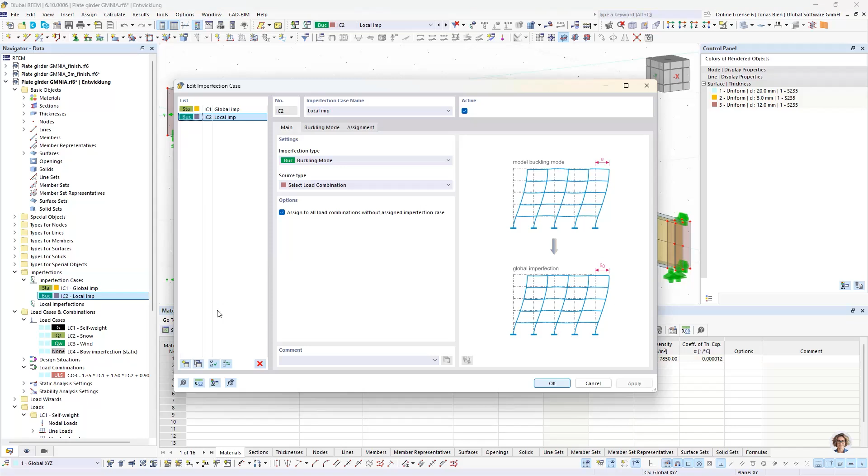So instead, I just generate an additional imperfection case with a group of imperfections, where I now superimpose the 2 imperfection cases, imperfection case 1 and 2, and I can do this very conveniently over this table, where I just define that imperfection case 1 should be present together with imperfection case 2. You could change direction here very easily by modifying this factor, or also you could lower the amplitude by just putting here like 0.8 or something, if you would just want to apply 80% of the imperfection. And then I just need to assign this group of imperfections to the load combination that I want to use for my GMNIA.

For now, we only have this load combination 3 that we used, and we also need the buckling shape imperfection, so we need to have this still defined. I will not alter that or take this as my GMNIA load combination, but instead I want to copy it, and this one I then want to run the GMNIA analysis on. This means I want to consider the full set of imperfections. The flange twisting is embedded or engraved into our model, and the other two imperfections are now taken into account in this load combination here.

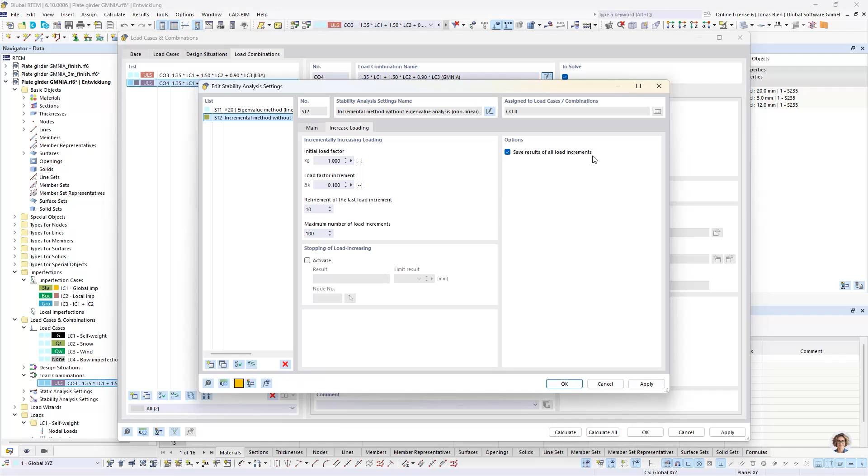But what I would highly recommend would be to save results of all intermediate load increments, because analyzing those intermediate deformation results, stress results, strain results, gives a lot of valuable information to assess the failure mode and the behavior of the structural elements. So I would always recommend to do that. And with this, 95% of the job is done.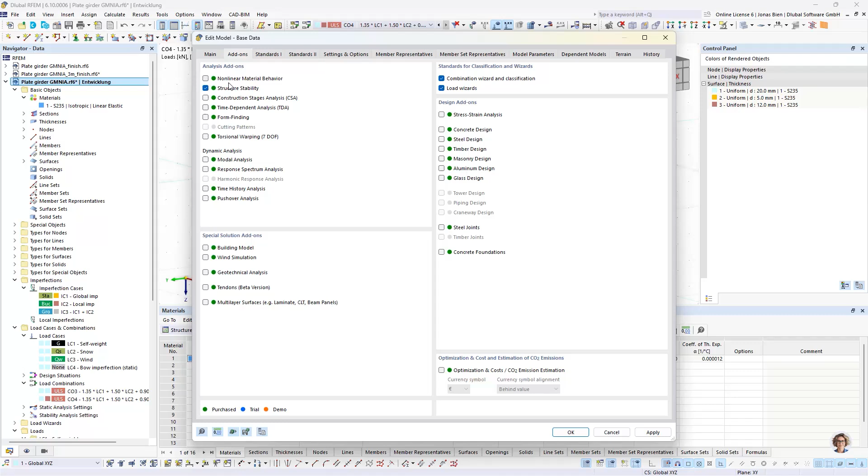The only thing left is the nonlinear material. In the beginning, we defined a linear elastic material here without putting too much thought into that. But we of course need also a nonlinear material, and to access all the nonlinear material models in RFEM, we need this additional analysis add-on here, and we also need to activate it for our model. And when we do so, we finally get access to all those nonlinear material models. For our job, I want to use a plastic isotropic material model for steel, for surfaces and solids.

And the von Mises failure hypothesis, or yield hypothesis, is quite fine for us. I don't want to spend too much time with the material definition. I talked about this also in our older webinar, so if you are interested to see what options the Eurocode gives us and what is suitable for such an analysis, I would highly recommend to check the old webinar.

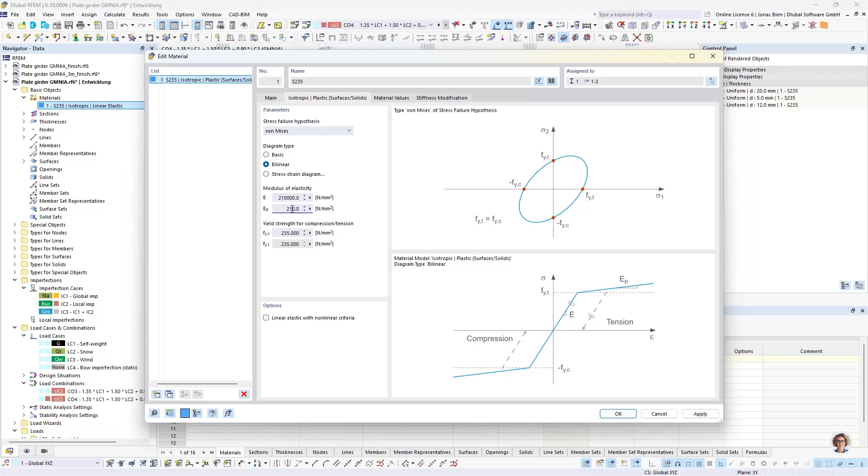But now I will just go ahead with a bilinear stress strain model, and I want to use a hardening modulus of 1/1000 of our initial modulus of elasticity, which is valid with regards to the Eurocode rules. And because I have now taken a user-defined hardening modulus here, I also need to reset my yield strength, because I made my material model a user-defined material model.

Okay, and this would be all the steps necessary to set up the GMNIA analysis. The solution of this problem as we defined it would probably take like 4 or 5 minutes, and I don't want to bore you with this simulation, so I have already calculated this, or a calculated version of this. It should be more or less the same model.

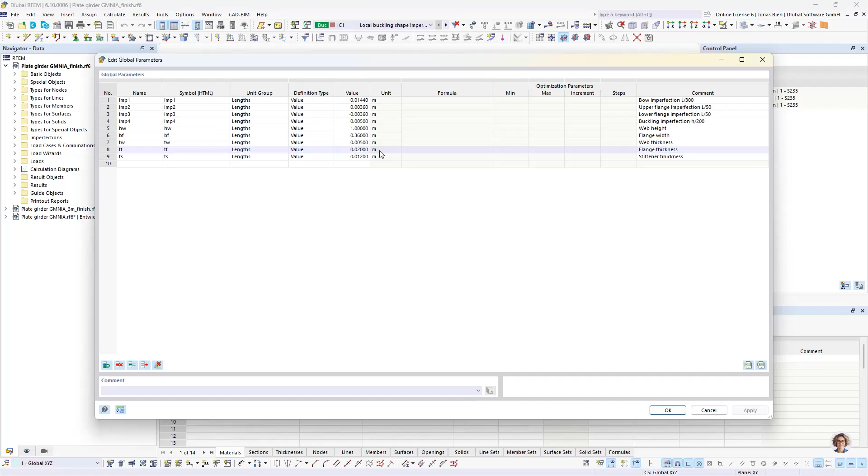The only thing I think is different is that I also baked these bow imperfections into the geometry, and only the local buckling shape imperfections are defined as imperfection case. But in addition, everything is parameterized in this model, and this is also the model I will hand over to you with the presentation and so on, so you can play around with these numbers and do your own investigation on your own geometry and your own plate girders if you like, and you can vary stuff very easily.

So with this being said, let's check the deformations or the results of our load case number 4. Since we have conducted a nonlinear stability analysis, we also have results for that. And what we already see is that the highest load increment that converged was 15 with a load factor of 1.95, which is quite far away from 1. Or even if we consider the safety factors that I initially mentioned, it's quite far away from that. So that's already a good sign.

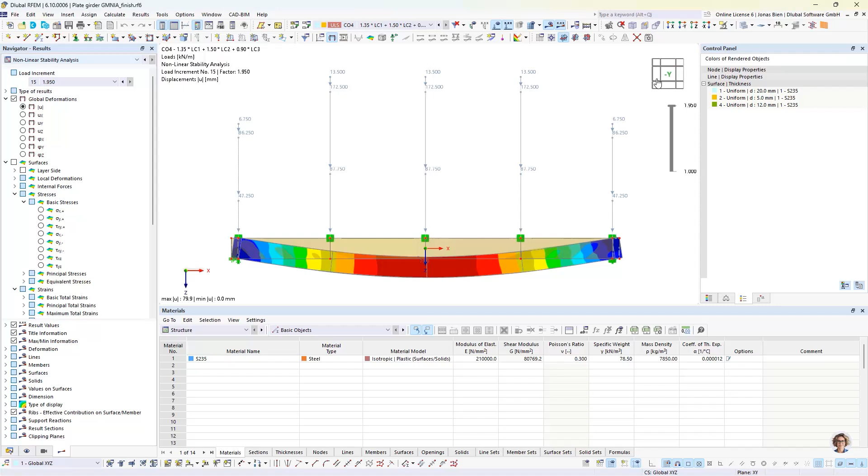And since we saved all intermediate results, we also have this slider that we can now leverage to check different results during the calculation. For example, one thing which is quite interesting is if we check the lateral deformation. I can just quickly get rid of the model and all the stuff that we don't want to see. But you can also now animate the deformation over the course of the simulation. This is also quite a nice feature.

And what we see as we approach the maximum load factor is that these lateral deformations of the compressed flange explode. They really increase a lot with a small increase of load. So this would already, from looking only at the deformation shape, give us some indication that probably lateral torsional buckling is the failure mechanism here, and is the reason that after this load step, no more additional load steps converged, so to say.

We can also check the load deformation history, the global one, for example. We can display in a calculation diagram where we compare the load factor with the maximum deformation, and we can see that the stiffness of our system approaches more or less 0 at this point. Negative stiffnesses we cannot compute with our solver. You need special solvers that are able to compute also the softening part. So this is probably the most that we can get with our methods of this analysis, and that would then also be the load factor that we would take for our failure criterion number 1.

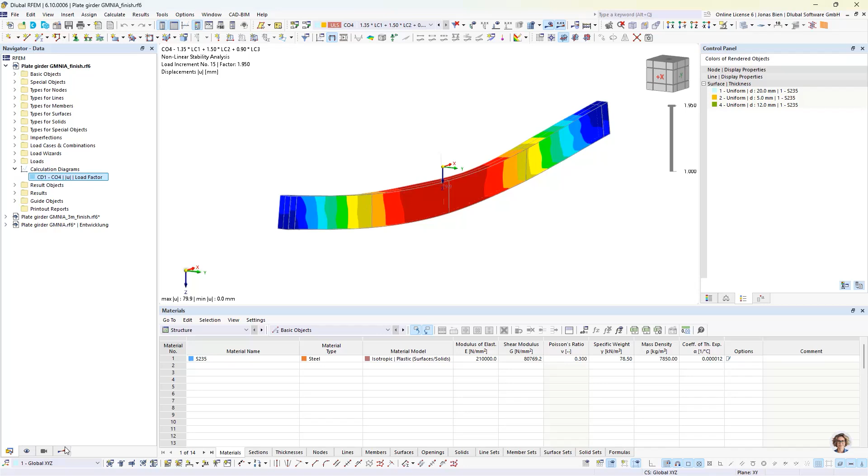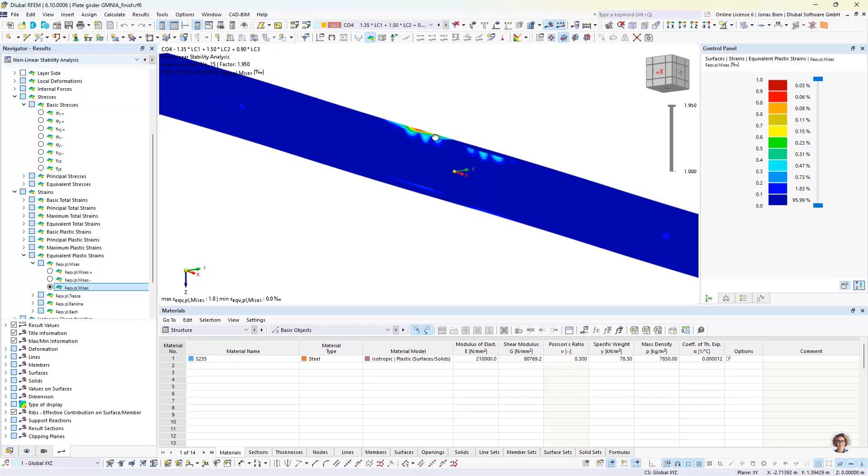And when we remember the failure criteria for GMNIA analysis according to Eurocode 3 part 1-5, there was a second one mentioning plastic strains. So let's also address this and check plastic strains in the model. And we see that at the end, so at the maximum load factor, we have strains of approximately 1 per 1,000 in the flange region, in the upper flange at midsection, so where our compressed flanges actually deform most, and also in the transition between flange and web plate. There are only very minor strains visible in the shear panels itself. So the strain-based criterion would not be relevant, and we would only check the 1.95 as a maximum of the load deformation curve against alpha 1 times alpha 2, which would definitely be lower than this. So that would be our check, basically.

So this is quite interesting for me, at least, to get a feeling for the failure mode and to check what the deformations look like during this calculation, and what happens if we push over the linear behavior of this model, and what happens then. And it's in the next step also interesting to see what happens when we change certain parameters. For example, I simulated the same girder with the same loading conditions, just with shorter buckling panels of 3 meter. And when assessing the results here, it looked quite different.

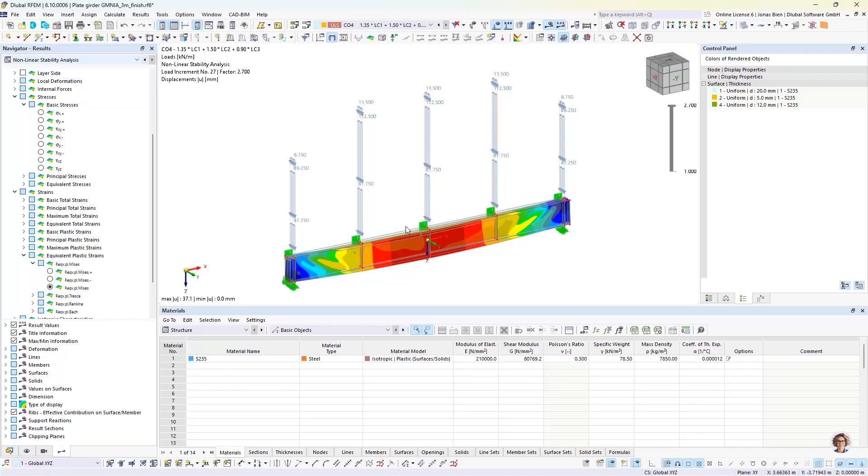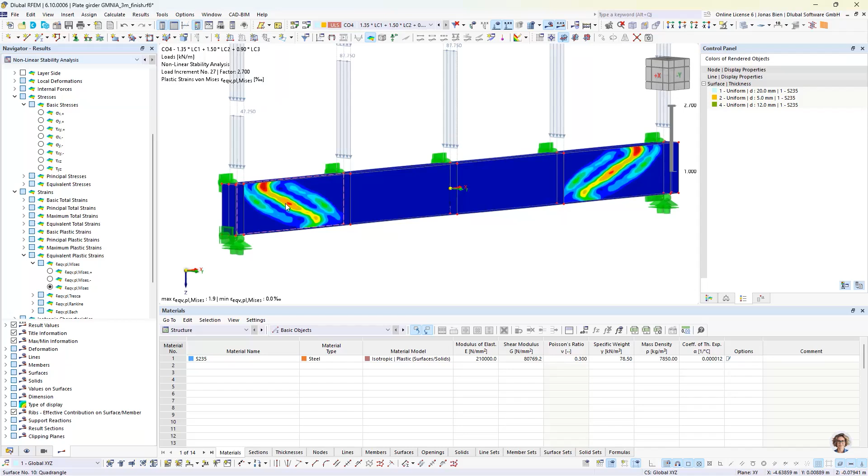Of course, due to our imperfection, we also have some transverse deformation occurring in the model, but they are not as pronounced as before. Instead, if we now look into our strains in the model, we see that the maximum strains now are not found anywhere near midspan, but in the buckling panels close to the supports, and those are also a bit higher already, although nowhere near the 5% limit. But we can see that the strains throughout the last load increments increase drastically in these shear panels. So in this case, we could expect a whole different failure mode, not the global lateral torsional buckling mode, but rather a shear buckling mode in these external buckling panels here, as a critical failure criterion.

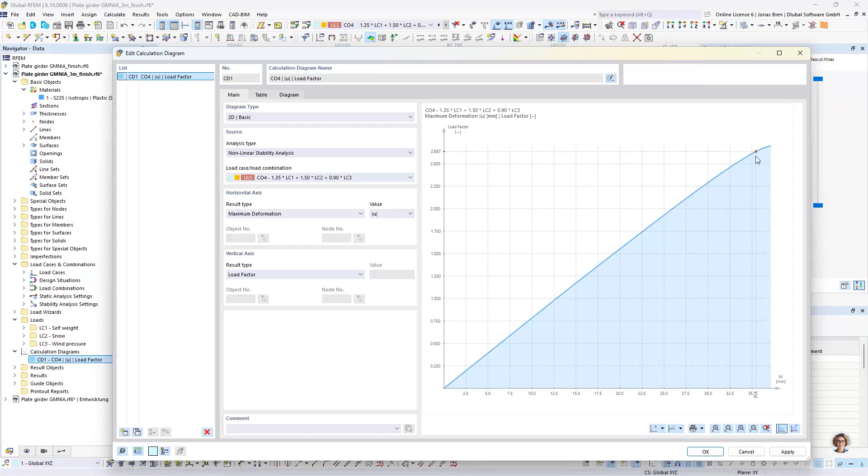We could also see how this nonlinearity or the excessive deformation in those shear panels affects the global load bearing behavior, and we can also see that the stiffness of the global system becomes much smaller.

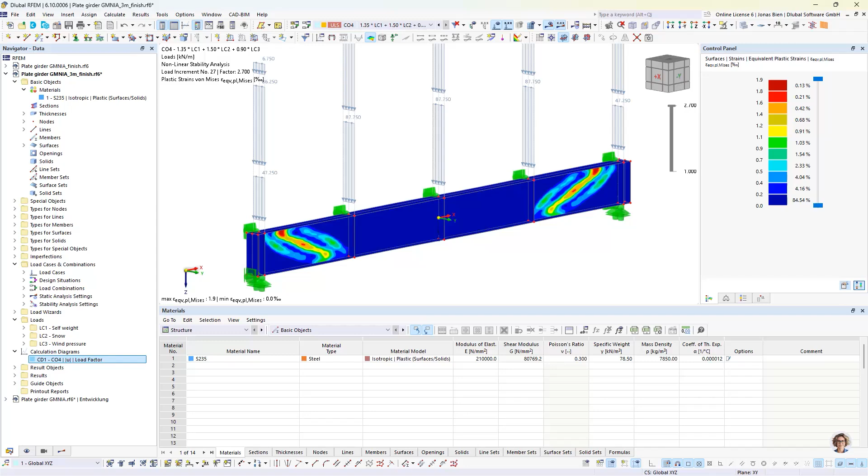Okay, so that for me would be very interesting to see when these different failure modes diverge, what do I get when I change certain parameters, when I change the web thickness, for example, and so on. So that's quite a nice exercise to do, and if you have a fully parameterized model, it's very easy to do as well.

Okay. So that would be all I want to say regarding the results, but maybe before we get to the summary, I would highlight that we have chosen the direction, the mode shape, and also the combination of our imperfections, in our case now for this exercise, more or less arbitrarily due to obvious time limitations. The Eurocode, however, stipulates that imperfections should be combined in such a way that the lowest load magnification factor results from the simulation. This means that further investigations would be necessary, of course, so you would need to also check other imperfection directions, and especially combinations of those different imperfection directions between the bow imperfection, flange twisting, and local buckling shapes.

For the initial model with 4.5 meter long buckling panels, it showed that by taking a different mode shape, especially mode shape number 13, which involved this deformation in the internal buckling panels, together with a member bow imperfection, and in the second step also aligning the imperfection direction of this member bow imperfection and the local imperfections, we get a slightly smaller critical load factor of 1.82. Remember that in the initial step with our initial guess, we got a load factor of 1.95. So there's quite some difference. It would still be okay. It would still fit into the limitations, but this is of course something we cannot forget, that this is also a huge part of the analysis.